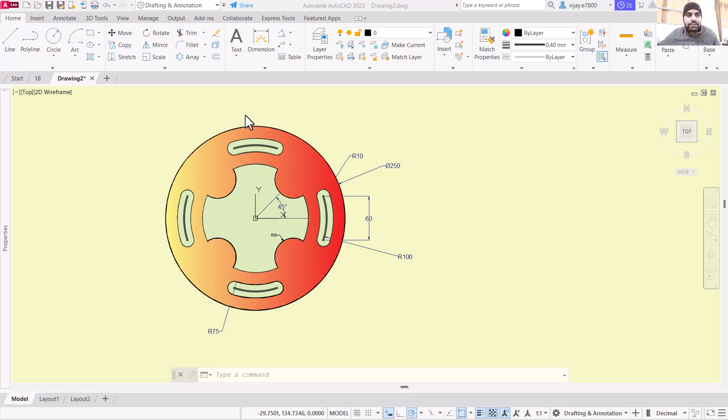In this video we are going to practice the drawing visible to you. We will start with drawing circles, then create a groove, after that create another one, and use polar array to repeat this particular drawing. It might look a little complex, but the drawing is very simple. So without further delay, let's start drawing, and I hope you will learn something new.

In order to draw the diagram, we are going to start with circles. We are provided with diameters, so we are going to use circle using center and diameter. Specify center as 0,0 and specify the diameter as 150 units.

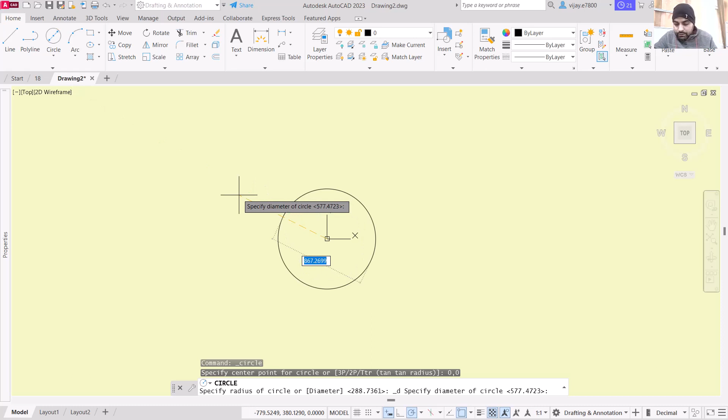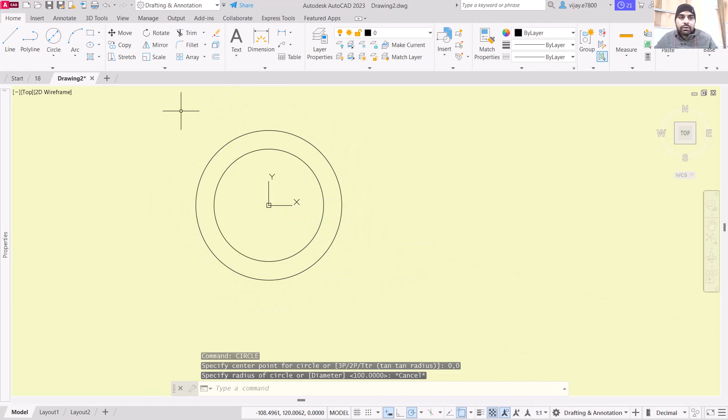Now after 150, the next two circles are of diameter 200 and 250. We are going to use the same command. Same center, 0,0, enter, and this time the diameter will be 200. Then repeat the same command using center and diameter, and this time the diameter will be 250. Press enter.

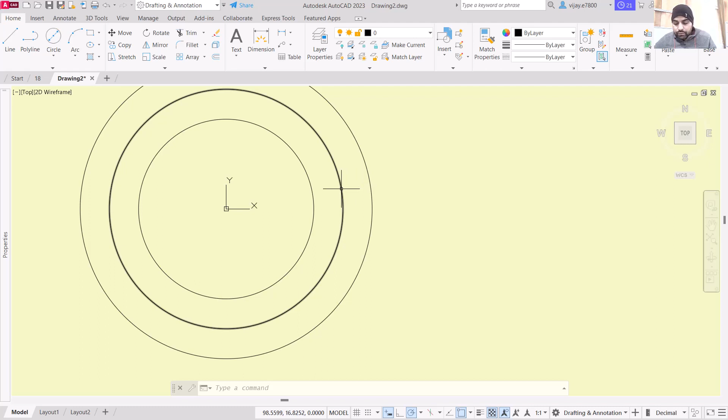Now we have created the outer circles. The next thing we need to understand is that the 200 diameter is basically for the dashed circle, so we will need an offset of 10 units.

So what I'm going to do is use the offset command, and the offset distance should be 10. Click on this circle on the outside as well as on the inside.

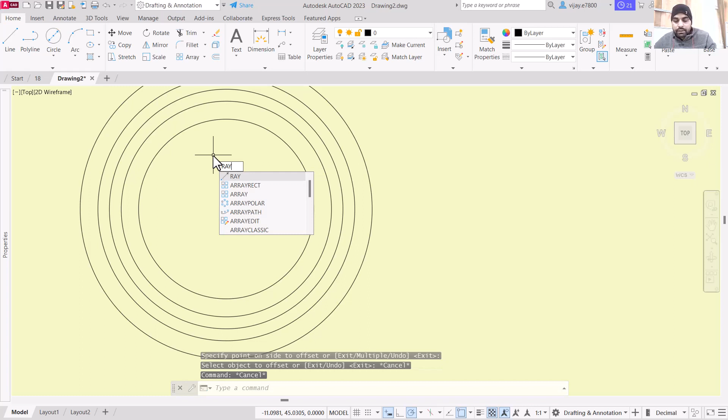After that, I'm going to use the ray command. Let's get out of this offset command, press ray, and specify the starting point. You can use the construction line as well, so it's totally up to you. Specify the starting point as the origin, press enter, and draw it like this.

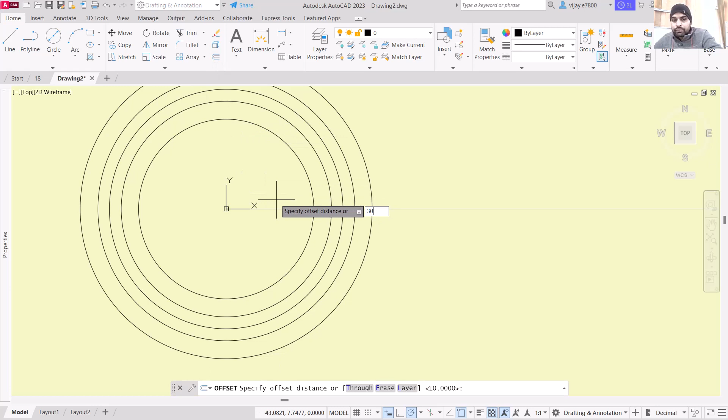Now I'm going to use offset again, and create an offset of 30 units on both sides of this ray, on this side as well as on this side. So this is the portion that we needed for the grooves that are there.

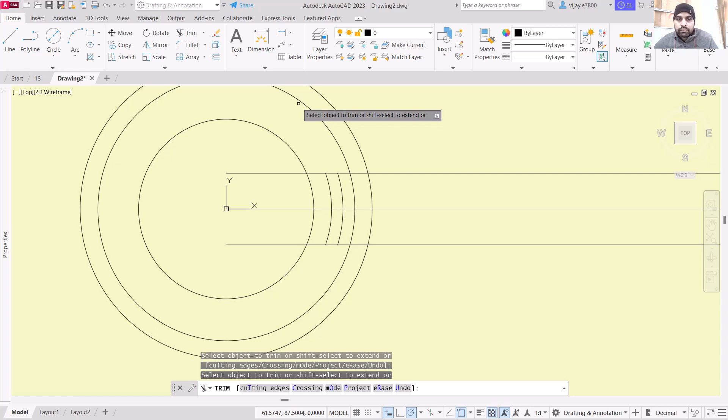Now I'm going to use the trim command, and I'm going to remove all of these portions, as well as these lines.

So basically we have created a groove. The next thing we are going to do is remove all of them, remove this one as well, and get out of this command.

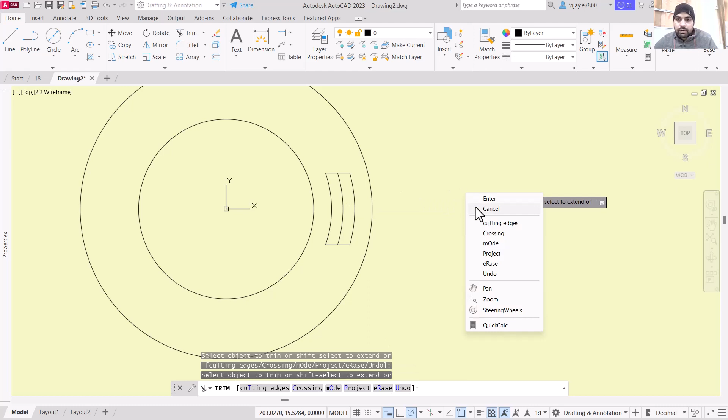So after creating all of these grooves, we are going to remove the inner and the outer portion. Now we need to create an offset of this particular drawing.

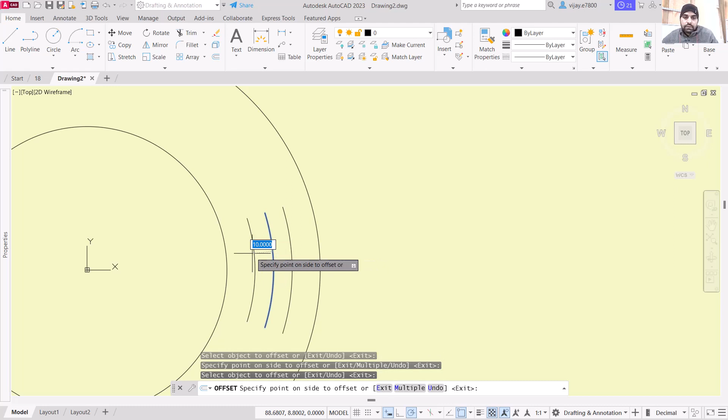Click on offset, press enter, and then specify offset distance as the radius. Instead of creating an offset of the complete circle, we needed to create an offset of this particular portion. So click on 10, and these two will be the offsets. So this will be the groove instead of that line.

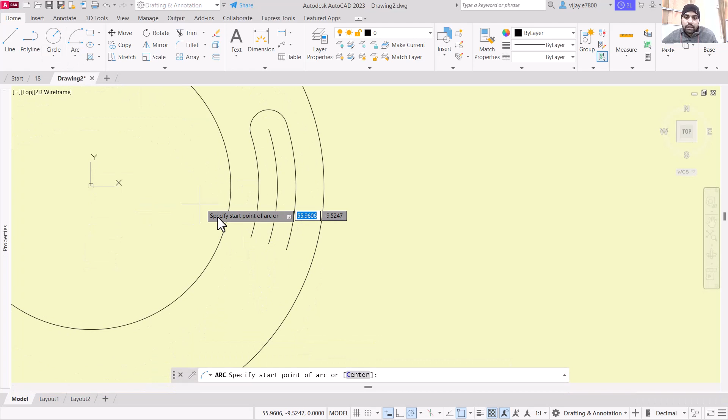Now what I'm going to do is use the same arc command using start, center, and end. So this will be a starting point, this will be center, and this will be the end. Similarly I'm going to use the same arc command, specify the starting point, then center point, and then end point.

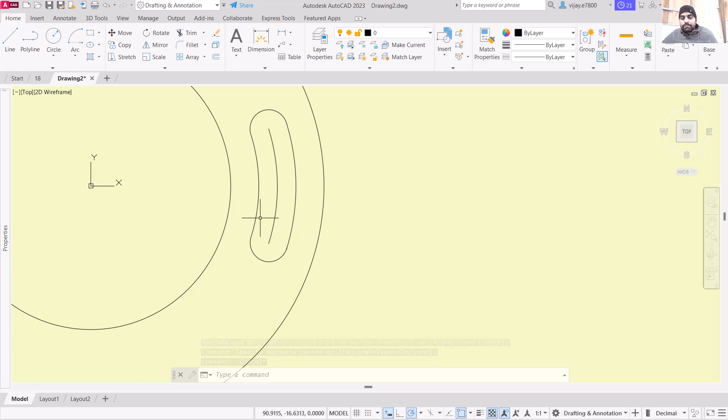Now if the direction of the arc that you are inserting is not correct, or if it is inverted, you can press the control button and keep it pressed, and the direction will be reversed. Now the next thing I'm going to do is create an array of all of these objects.

So which array am I going to create? I'm going to create a polar array. Click on polar array, then select all the objects that you want to repeat. We can repeat this one as well.

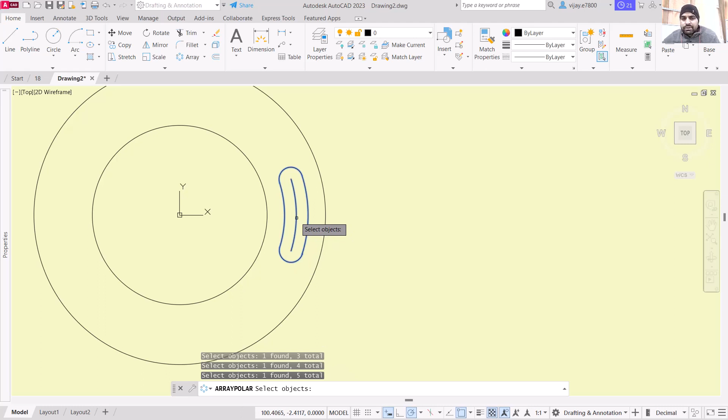Press enter, then specify the center, and then we need to specify the number of items. So how many items do we need to insert? As per our starting drawing, it should be 4. So instead of 6, click on 4 and click on close array.

So basically we have created the grooves. The next thing that we need to create is a line.

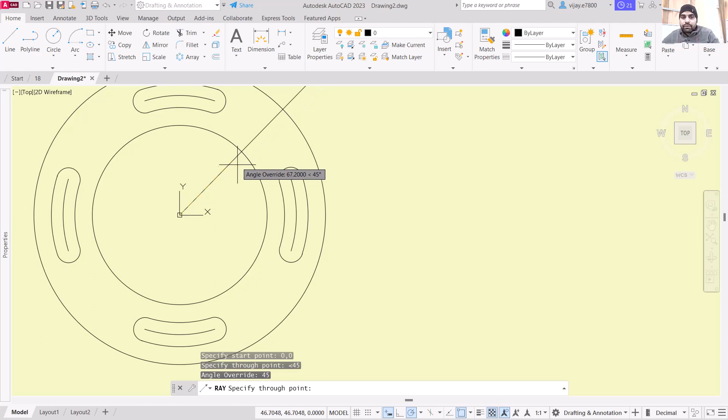Okay, so you can use ray as well. I'm going to use the same ray command and specify the starting point as 0 comma 0. Press enter, and after specifying this, I'm going to draw a ray at an angle of 45 degrees.

After coming out of this command, I'm going to create circles of radius 25 units. So center and radius, click on this as the center and specify radius as 25 units and press enter.

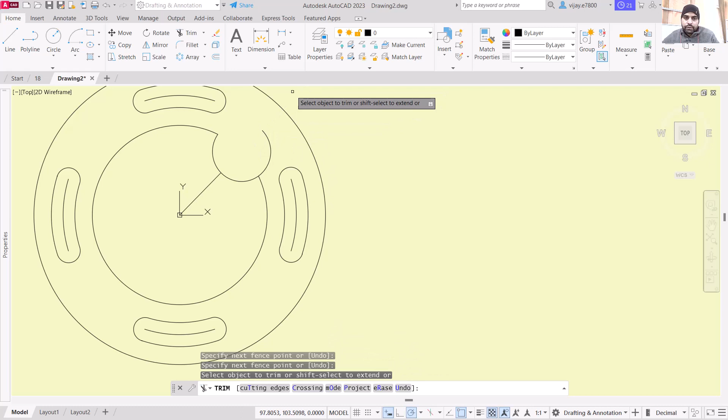Remove the non-required portion, so we are going to remove these portions that we don't need. This groove as well, we need to rotate it by 45 degrees, sorry, polar array.

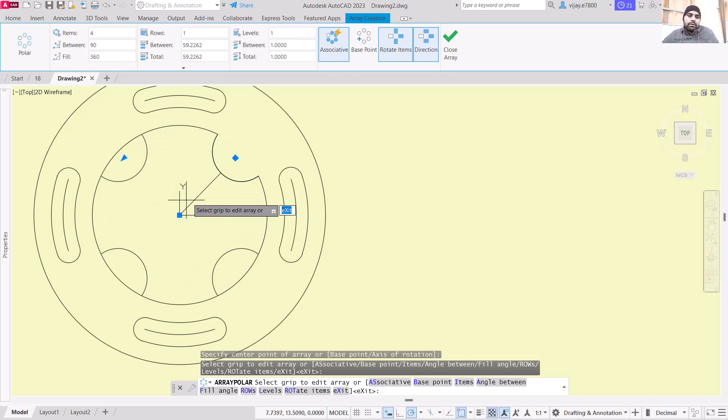Click on this object, click on polar array, specify the center point and specify the number of items as 4, and press enter. So basically all of these grooves are created, and we are going to use the trim command to remove these portions. We will need another line in order to provide dimension, so that's why I'm keeping it now.

I think all of these lines are created. What I'm going to do is specify or provide dimensions. So click on dimension, then starting point and ending point.

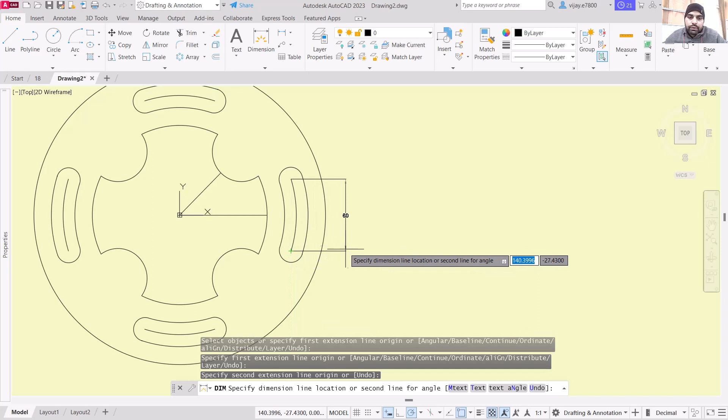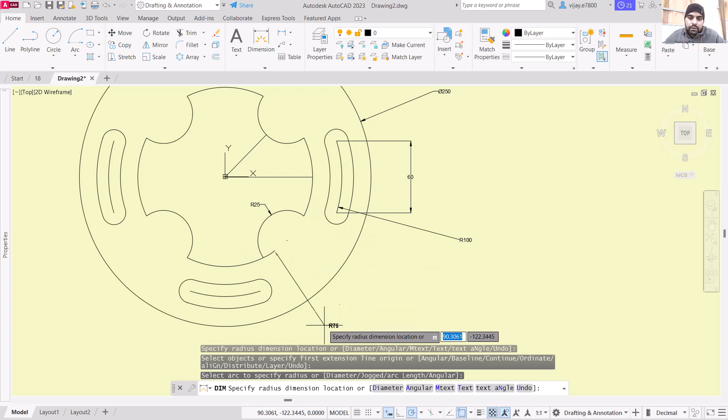So this is 60 units, then diameter of this one is 250, diameter of this one is 100 units, sorry, radius is 100, diameter is 250, radius of this one is 25, radius of this one is 75.

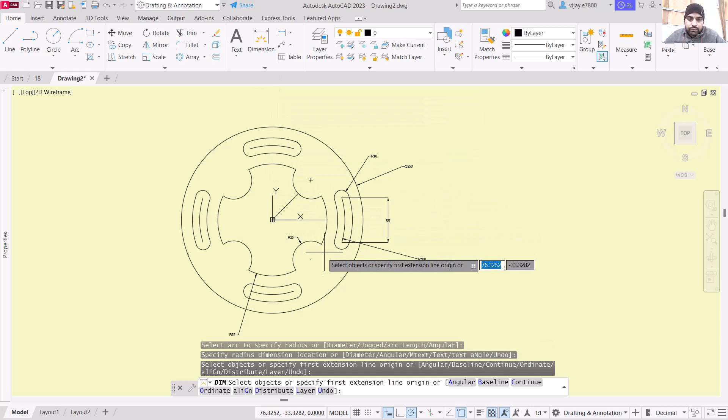What else do we need? We need the outermost circle, I think we are done. Then second one, okay, we need this one, radius of this one is 10 units. After that, basically we need an angle, so I think this dimension is done.

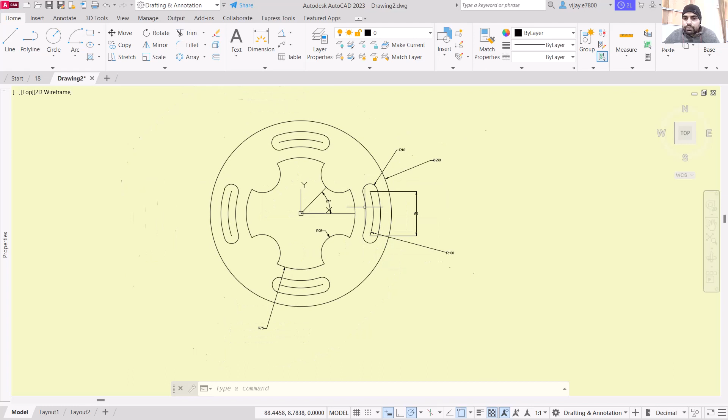Go to angular, click on this line and specify this angle, so this one is 45 degrees. I hope all of the dimensions are done here. Do we need anything else? I don't think so. Okay, the radius is also done.

Now we can explode these arrays. Select it and click on explode, press enter, and they will be separated. Same we will do for this one as well, explode and enter.

Now all of these lines that we need to change, we can select all of them and then change their color. Use a darker color, then right click, go to properties.

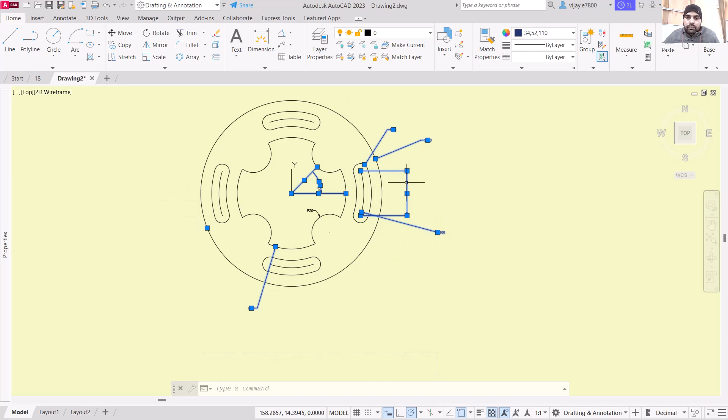There are certain lines that we have inserted here, so instead of lines I'm going to select all of the dimensions so that I can increase the text height. Select it, right click, go to properties, go to text and increase this text height to 6. Let's check, okay, it works fine.

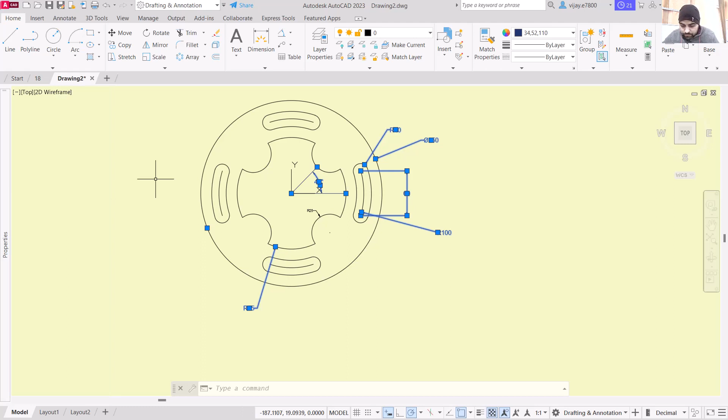Now what else do we need? I think everything is clear now. So the next thing that I'm going to do is create a hatch of a gradient.

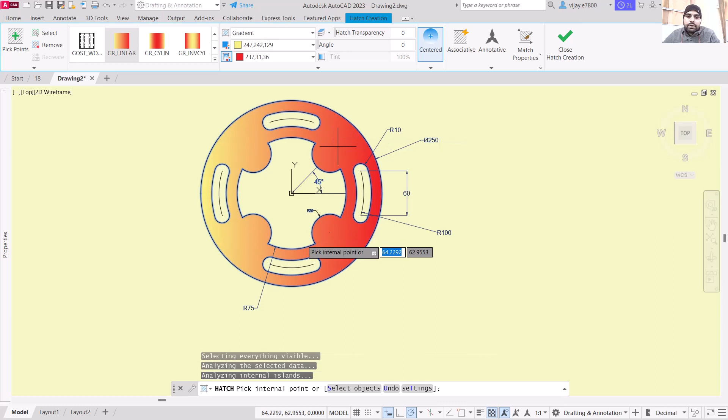Then click inside this area and we are done. Now we can remove these grooves as well if we want, but we don't need to. So this is the drawing that we wanted to create.

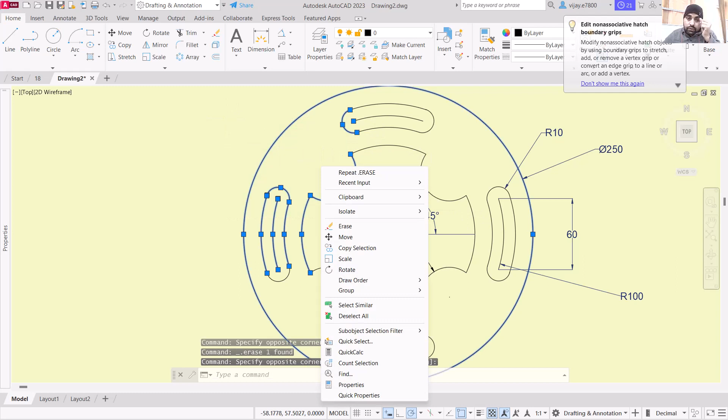Now if you want to change a little bit, I'm going to select all of these lines, select similar, so all the lines are selected, and I'm going to increase the line weight. Line weight settings, click on display line weight and select a specific line weight that you want to create.

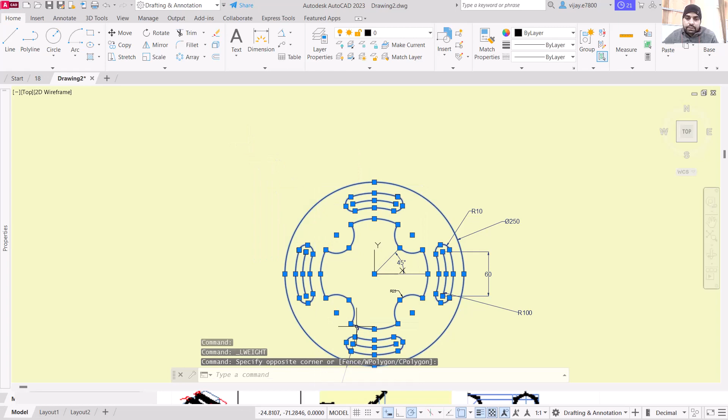It's not increased, select similar, all of the lines are selected. Now instead of bylayer, increase this line weight, press escape, and then we can use the hatch of the same gradient.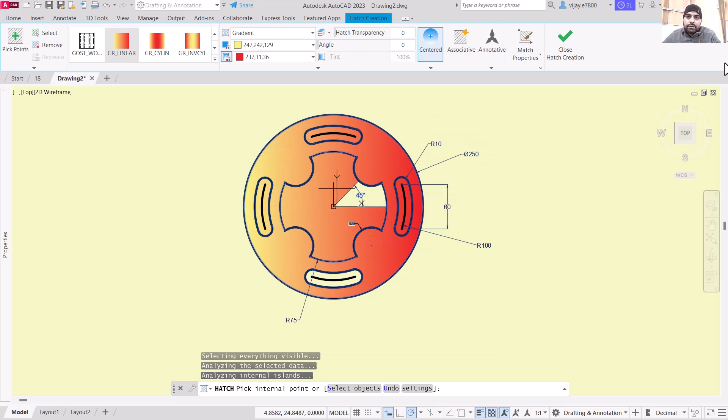Click inside this area, then we can close hatch creation. We can use another pattern for the grooves or anything that we want.

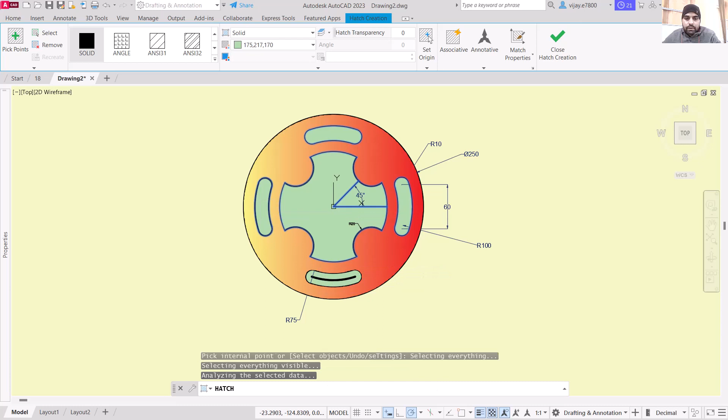So click on solid and let's fill it with a little lighter green area. This one, this one, this one, this one, and this one, and click close hatch creation.

So this hatch, we can make it transparent so that inner lines are visible and dimensions are visible. Click close. So this is the drawing that we wanted to create.